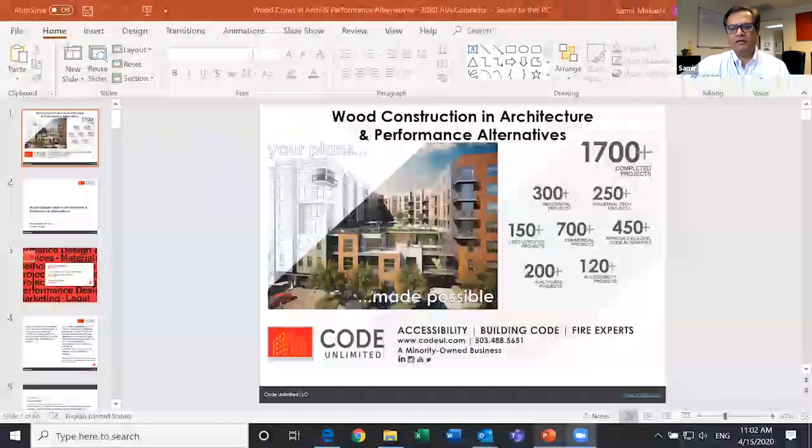Good morning, everybody, or good afternoon for you guys. I'm 1 hour behind you guys. So I'm going to share my screen, and hopefully everybody can see my screen, and we'll start from there.

This is a unique presentation that I custom designed for AIA Colorado. I've given similar talks to other jurisdictions, but this is custom fit to your needs and requirements. So we'll talk about that.

In this presentation, we're looking at wood, especially mass timber, and talk about that. Then we're going to talk about alternates to the prescriptive code requirements. We work with a lot of architects, engineers, and owners developing alternates. Sometimes the alternate is because you got in a jam by following something that the jurisdiction says does not work, or the code has changed or something like that. We develop an alternative that is equal or better.

And sometimes it's your creativity. You're developing a design and pushing the boundaries of the design that doesn't fit very well in the code framework that is designed for one size fits all.

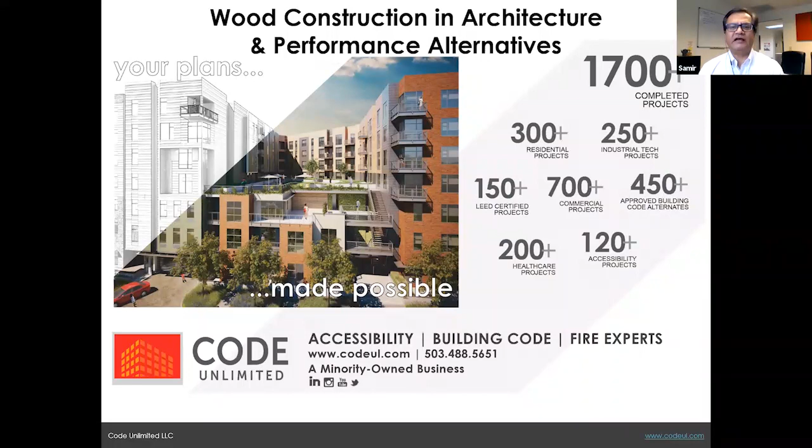So with that, we'll go through a couple of requirements for HSW credits. We're going to talk about wood construction and performance alternatives. AIA Colorado will do the continuing education credits, and it's registered for 1 hour HSW.

Tim just talked about me and what I do, so we'll skip this slide. The learning objectives: we'll give you an overview of type 3, type 4, and type 5 wood construction. Then CLT is cross-laminated timber, which is a subset of mass timber.

Type 4A, 4B, and 4C construction are the construction types that are coming. This is approved in the 2021 ICC code change, so it is not even in the 2018 code, but it's adopted upfront by many jurisdictions, including Colorado, Oregon, and Washington. Oregon has adopted it into the codes we adopted in 2019. Washington has adopted it as a separate add-on amendment to the code, and I'm not certain how Colorado is doing it. But either way, this is becoming more prevalent; more states are coming on board and doing it.

We'll understand the code intent and how to isolate code sections to develop code alternates. When you're writing a code alternate, there's a specific framework and method to it. I'll talk about it as I go and discuss the different alternates that we have done.

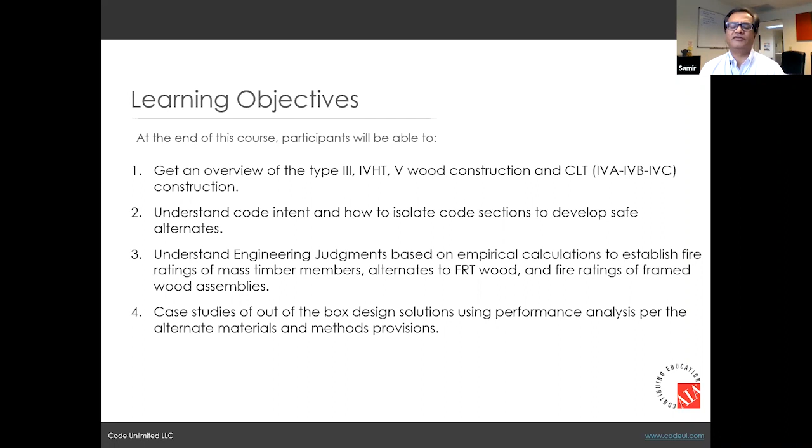So we'll start with the wood construction types and get into mass timber. Amongst the wood construction types, type 3 is the least understood construction type in working with different architects and jurisdictions. I find a lot of spec office, spec warehouse buildings that are 2-story with 60-foot yards, often listed as type 5B. We look into the details and find that they're actually type 3 construction, not type 5.

In a type 3 construction, there are a couple of critical things. One is the exterior walls are non-combustible, or fire retardant treated wood if the wall is 2 hours or less. The interior elements can be any material permitted by this code, meaning wood, steel, anything. So even though these are typically wood buildings, you're permitted to have non-combustible steel framing within it. The wood becomes the lowest common denominator.

In this example, if you look at the lower left picture, the exterior wall is a masonry wall. On the top left, it's a precast concrete tilt-up panel, and the roof framing is wood. In the middle picture, you can see there are some heavy timber members and some regular wood framing, so it's a combination of pieces. Type 3 could have multiple elements you typically consider wood, but it could also include non-combustible elements. The exterior wall has to be non-combustible or fire retardant treated.

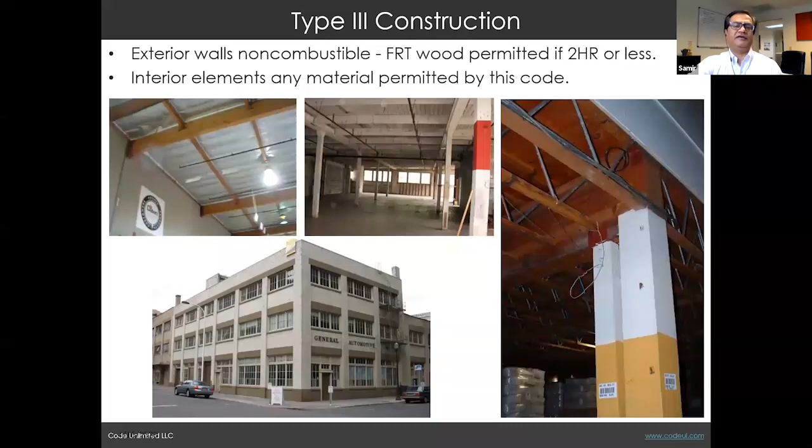Type 4 construction, on the other hand, is very similar to type 3, but it's not frequently used, because of its restriction on concealed spaces. In most facilities, if you have a drop ceiling or something like that, you would have a concealed space, and type 4 construction does not allow it. Type 4 evolved after the Chicago fire, when there were a lot of warehouses and storage places with heavy timber construction, and when the fire started, it just spread from building to building to building. So the interior is heavy timber, and the exterior, again, is non-combustible construction.

When you have heavy timber construction, heavy timber is defined by the size of the solid wood, but it also allows you to have solid wood, glue laminated wood, structural composite lumber, or cross-laminated timber as part of the type 4 construction within the 2015 and 2018 codes.

In that code, this table summarizes it. If you have solid sawn, the left two columns show the width and depth of the sizes you require, then the glue laminated dimensions are different, and structural composite is different. That's based on the performance of the different members and how they're available, either nominal or actual dimensions. The dimensions given are the actual dimensions of those wood pieces.

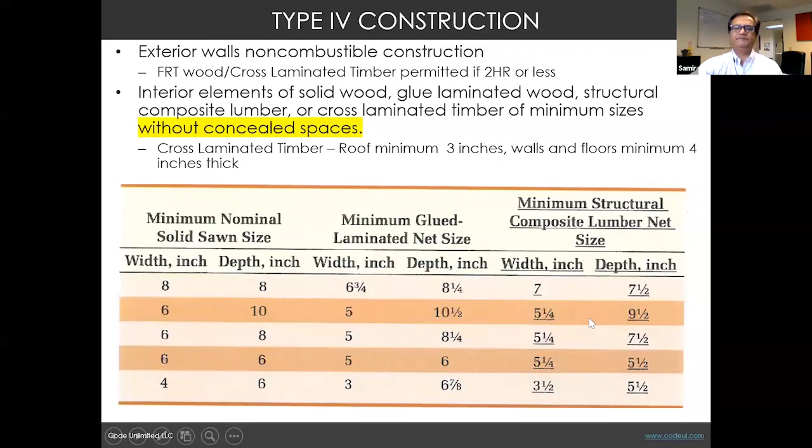Here's an example of heavy timber. You've seen the log cabin type of construction, that is heavy timber. You've also seen some CLT uses, and that can also be part of heavy timber. And then 2021 creates a separate CLT construction type, which we'll go into in detail as well.

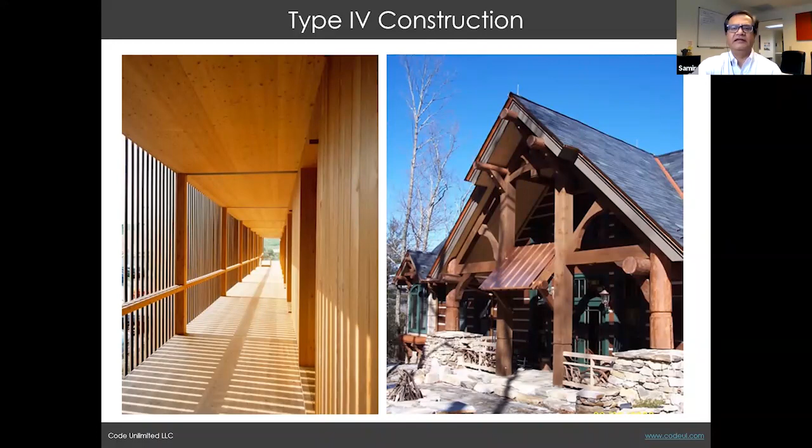Type 5 is the lowest construction type that you can build out of. Again, type 5 is typically understood to be framed wood construction, but you can have plastic as an element, and you can have steel as part of that construction type. Type 5 is typically the lowest construction type, so your typical areas and number of stories are all limited, based on the risk assessment and risk management of the code. The lumber sizes, the nominal number versus actual dimensions - some architects work a lot more in wood, others don't, so understanding what you're seeing and what your code requires is important.

So again, type 5 is anything in wood, typically wood framed, does not have a restriction on the exterior walls like type 3 and 4 have. Type 3 and 4 both require the exterior walls to be non-combustible or fire retardant treated. Type 5 allows any construction type.

In these construction types, there is type 5A and type 5B. Type 5A is typically 1 hour construction. Type 5B is non-rated construction.

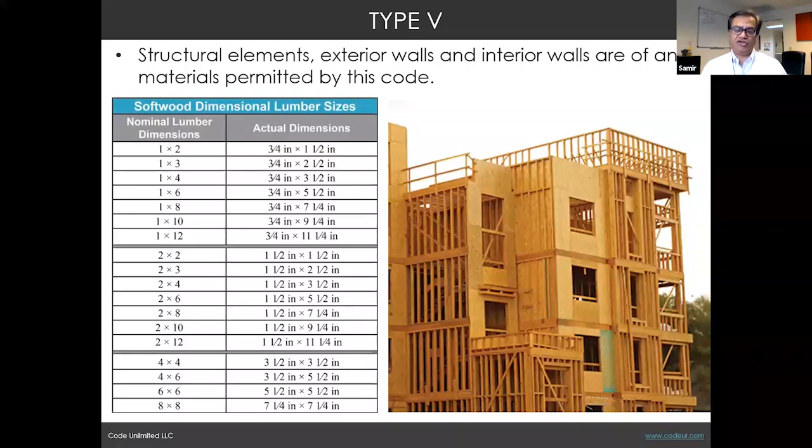Similarly, type 3A and type 3B. Type 3A is 1 hour construction, type 3B is non-rated construction. Type 4 is just type 4. Eventually, type 4 with the CLT becomes type 4 HT for heavy timber.

So let's talk a little bit about mass timber and how it's defined and how it works. Mass timber is the umbrella term, and under that you have CLT, cross-laminated timber; NLT, nail laminated timber; DLT, dowel laminated timber; glue laminated timber; and also parallel strand lumber. All of these are subsets of mass timber.

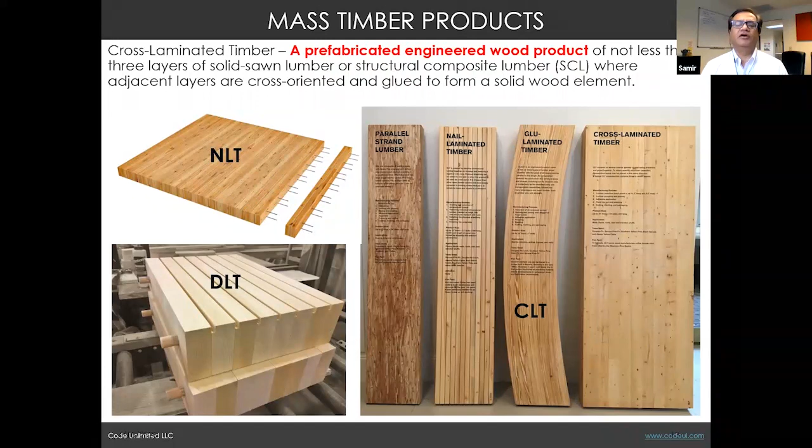Cross-laminated timber is a prefabricated engineered wood product, not less than 3 layers of solid lumber, placed in cross directions—one goes one way, the next layer goes the opposite direction, and the third goes back again. In a way, it's like a two-way slab, reinforced two-way slab, with reinforcement going both directions. That's the advantage of CLT, because the timber members go in 2 directions, it has strength in both directions.

Typically it's 3-ply, 3 layers, 3 lam or 5 lam or 7 lam. We've seen some larger ones, but 5 lam is the most common we've seen. 3 lam is typically not fire rated, 5 lam is fire rated, 7 lam is fire rated - that's typically how we find out. Panel thicknesses could be up to 15 inches; 5 lam is about 6 7/8 inches thick. The width of the panel can go from 2 foot to 12 foot, and length from 20 foot to 60 foot long.

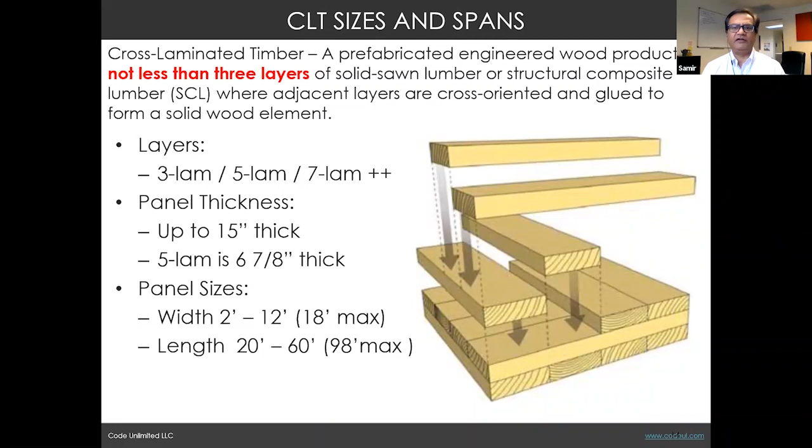These dimensions are really driven by the manufacturer's equipment and how large an equipment they have, what type of capacity they have, and that actually helps define the element of this.

So understanding mass timber and how it works - one of the common things that comes up with everybody is that wood is combustible. So if you're building a cross-laminated timber building, you're essentially creating a pile of wood that can be ignited by a matchstick, and it will all go up in flames. Let's get a little bit into the details of the material qualities and properties and how they're different.

Most commonly, fire marshals and others we talk to come back and say steel is the best element because it's non-combustible, it will not burn, and wood is the worst element because it will burn right away. Well, it's not that simple - there's a little nuanced understanding to it.

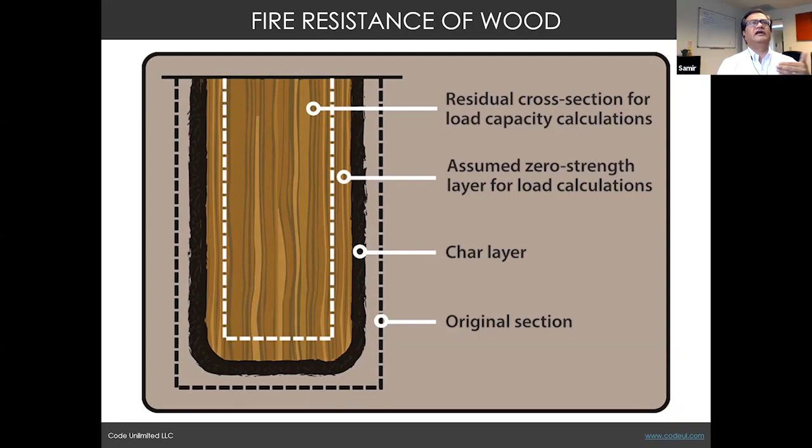One, steel, even though non-combustible, is typically not where the fire starts. The fire starts with the contents of the building, not necessarily at the structural component. Two, the failure of the material is also significant, because what we see as fire is flames, ignition, but really in terms of thermodynamics, fire is just elevated temperature.

Flame is one expression of the fire temperature, elevated temperature is the other, with a much more significant impact on structural elements. Steel, when exposed to temperatures over 1300 degrees Fahrenheit, fails - it becomes so malleable it cannot hold its weight and it falls. Typically we protect steel by sprayed fireproofing or an envelope around it, which provides insulation to prevent the temperature from outside that envelope from reaching the steel inside, so the surface temperature doesn't go over its failure temperature. This is how fireproofing works in steel.

Wood, or CLT, works very similarly. In this diagram, the white dashed line is the size of the wood member needed for the structural stability of the building. The black dashed line is the size of the member used to design the building. So the space between the white dashed line and the black dashed line is the insulating element.

So the fire attacks the outside and burns through, and until it burns through the white line, the temperature inside is not reaching the fire temperature.

Another thing significant in wood is that wood failure occurs by mass loss. Wood can handle a lot of temperature - the wood member can go up to 2000 degrees and not fail. It fails when you burn through. So a steel member can get exposed to elevated temperature and fail right there at that temperature, but for wood to fail, it has to burn through. As the wood burns through, the charring that takes place actually protects a barrier for the fire to progress, because the char acts as insulating material, and char also displaces oxygen, so it starves the fire.

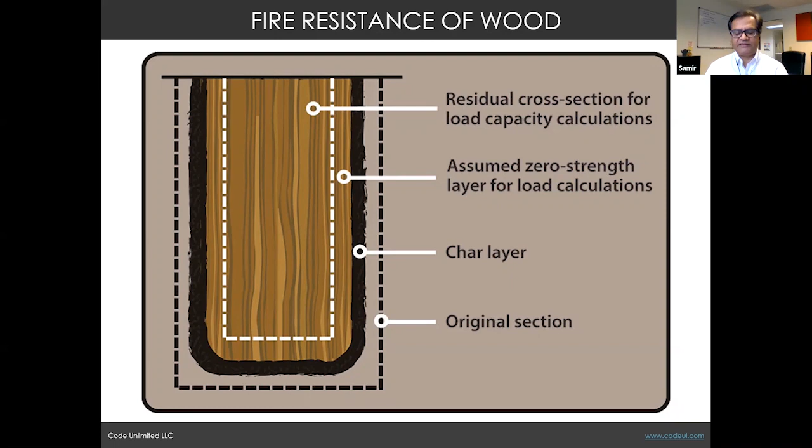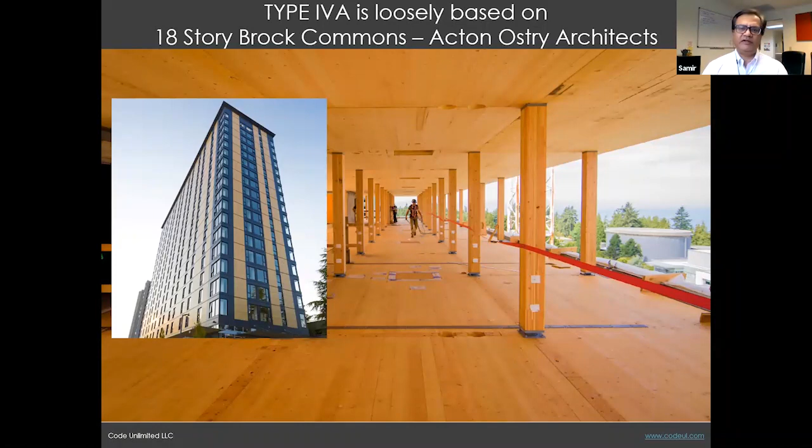So in the CLT there is type 4A, type 4B, and type 4C, the three different construction types. They're being introduced in the new code, and some jurisdictions have adopted them early. Type 4A is loosely based on the 18-story Brock Commons, done by Acton Ostry Architects in Vancouver, BC. The code team looked at existing buildings that had used mass timber and followed up on the research based on mass timber, but this is where it comes from.

The 18-story number comes from that building example. Type 4B is loosely based on a 12-story framework building designed here in Lever Architecture. It was not fully finished because the funding went away, but the building was designed and got all its approval through the local jurisdiction. That is a 12-story office building. If you look back at the code, you'll notice this 12-story office building is also comparable to type 1B construction and what is permitted under that.

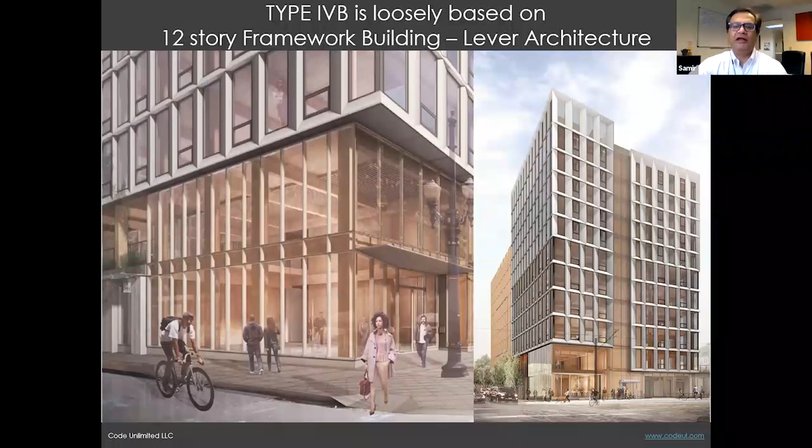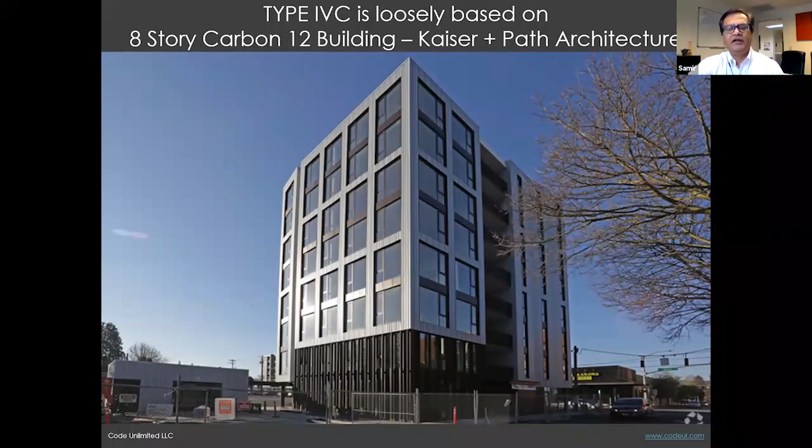Then the 8-story Carbon12 building is the one that was used to develop the type 4C construction. This was in Portland by Kaiser and Path Architecture, and that is the basis for it. So if you look at the type 4A, B, and C construction types, this is kind of the cheat sheet of what you need to know if you're starting into it. There's a little bit more to it, but here's what you start out with.

So in type 4C and type 4B, in both instances, the primary structure is 2-hour rated and exterior bearing walls are 2-hour rated. In type 4A, the primary structure and exterior bearing walls are 3-hour rated.

One of the things is that in all three construction types, the exterior wall face has to have a gypsum board on it. Then for the interior wood, there's a variation on whether it's permitted to be exposed. In type 4C, the interior wood framing, exterior walls, floors, everything can be exposed, and that is permitted. In type 4A, nothing is exposed, everything is covered up.

Type 4B is the in-between, neither A nor C, and is the most problematic area we're finding right now. One of the things happening is most architects want to design to type 4B, but they don't want the restrictions on the exposed wood. We'll talk a bit more about some of the designs we're working on where this condition exactly happens.

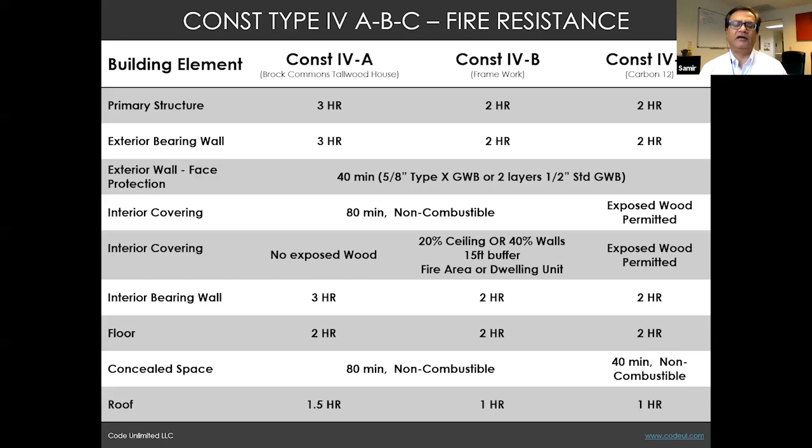In type 4B, you're allowed 20% of ceiling or 40% of wall exposed relative to the floor area. So if the floor area is 100 square feet, you can only have 20 square feet of ceiling exposed. If the floor area is 100 square feet, you can only have 40 square feet of exterior wall exposed. So that is the condition.

Now if you look at the allowable area and heights, you'll see the difference between type 4 and type 3, and between type 4A and B. There's a screen here blocking my path, I'll take that and put it on the side. So in type 3B, the building height is 75 feet. Type 4 heavy timber, or type 3A under the current codes, is allowed 85 feet.

So type 4C starts with 85 feet, type 4B goes to 180 feet, and type 4A goes to 270 feet. So it's pretty tall structures that are permitted under wood.

The advantage of CLT is it's lightweight. Typically steel and concrete structures get very heavy because your floor is always a composite deck, which carries a lot of weight as the stories go up, and wood is much lighter than that, so there's savings there. Also, the wood comes pre-prepped, so you don't assemble or frame on site. You get a manufactured piece, and the installation goes much faster than traditional building construction.

A couple of things to watch out for: in different occupancies like an I2 or an I3, there are different permissible heights and stories than what is permitted in other cases.

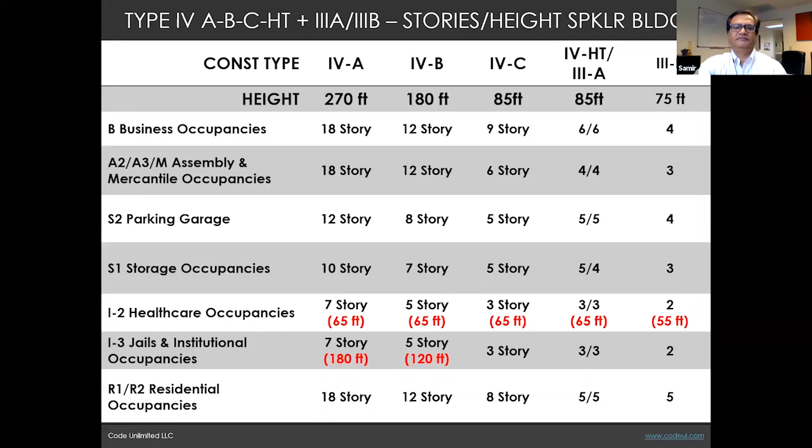One of the things that comes up is wood joinery in CLT. Because wood CLT is fire rated, the joinery is very important. In some of the early CLT manufacturing, the joinery was exposed, and we had to design fire ratings or fire rated protection for those joints.

Now, a lot of the material is doing concealed fasteners, like you see on the right, and the beam just slides right into it, and the fit is really, really tight. You don't get that kind of construction finish and accuracy, even in steel structures. So the finished product of CLT is very accurate, much more so than steel framing that we are used to.

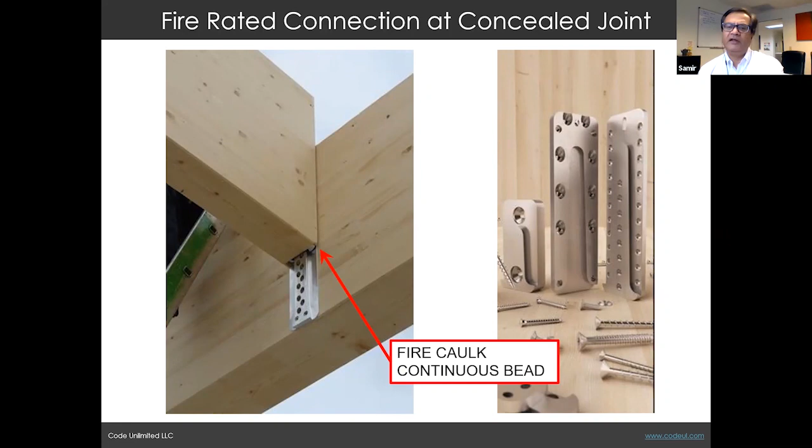And what you do is typically have a fine fire caulk continuous bead applied around the joint, and that gives you the fire rating because the steel is not exposed, and the fire caulking protects the joint from fire. Many of the assemblies are now tested for fire, so you have a listed assembly, but if not, we can create engineering judgments for those.

This is a condition where there's a wood column supported on steel plates, and then the concrete fills up and covers the steel plate, and that's how fire rating is achieved at the floor level when you have connections at the wood.

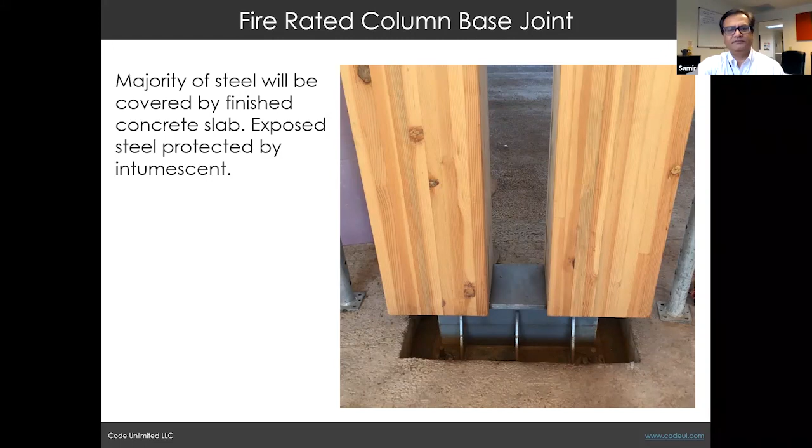There's also a lot of through penetration joint protection now available, with some tested assemblies. Some things to think about: when the joint, typically in a steel or concrete assembly, has a penetrating element exposed to fire, what happens is the penetrating element is the only thing affected by fire, and the rest of the structure is not.

But in wood, the fire also affects the wood, and as the wood gets burnt along the penetrating item, that condition is different than a typical concrete deck or steel deck. So the penetration assemblies are different for CLT than they are for steel or concrete members.

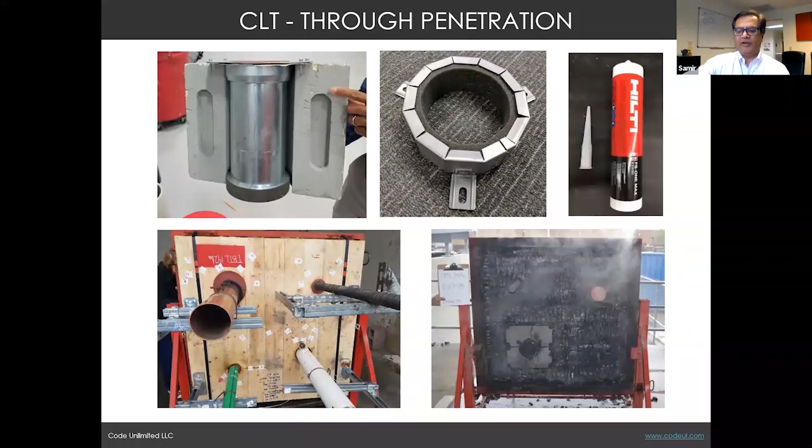So now we'll go into alternate materials and methods.

So there's two things in the code. One is called a code modification, and the second is called alternate materials and methods of construction and equipment. The code modification is really a waiver. If you cannot meet the code, you write a code modification to the jurisdiction and ask for a waiver because you cannot do it.

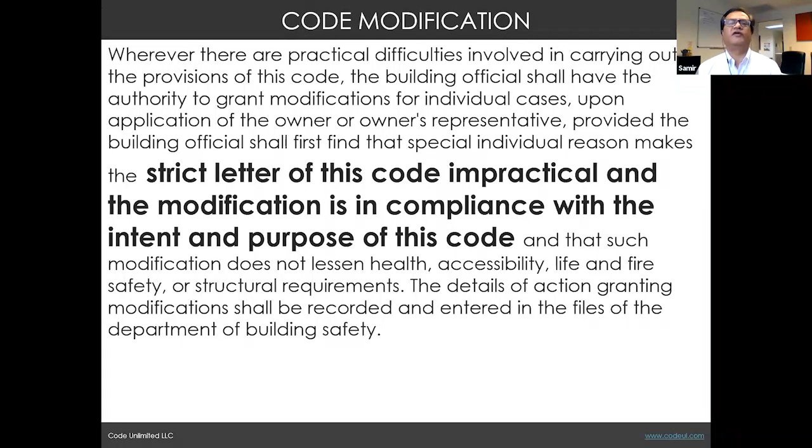Typically this happens when you have an existing condition that you cannot rectify - that's where you'll go for a code modification. The code alternate, on the other hand, is saying I don't want to meet the prescriptive criteria the code says, but I will provide equal or better protection with a different assembly or method of construction. Both are permitted by the code.

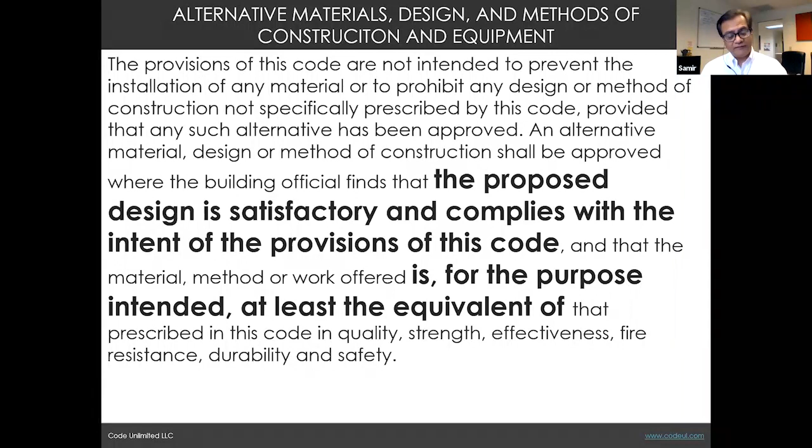The alternate materials approach is more common because the jurisdiction is not waiving the requirements but requiring you to meet them differently. When this condition happens, typically the key issue is that the onus is on the designer and the code consultants, often working with you to develop the alternative. So one of the things is also establishing what the code intent was behind it and then meeting that requirement.

So in CLT or heavy timber, there are standards established that allow you to calculate the fire resistance of the building element. Based on the thickness of the wood, we work with the structural engineer to understand how much of the wood is a structural component and how much beyond that is for fire rating. We can develop alternatives based on that.

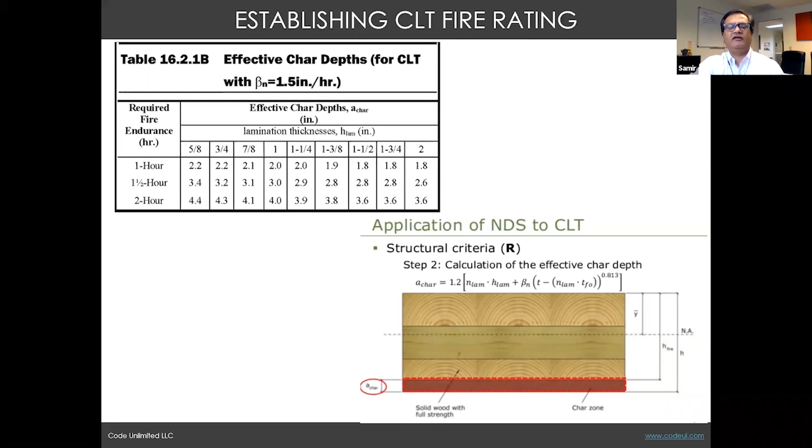We typically have an engineering judgment stamped by a fire protection engineer as the deliverable and final result that goes to you and to the jurisdiction.

I talked to you about the CLT systems prefer concealed fasteners - even today some architects like to see exposed fasteners and things like that, especially if it's a fire rated component that needs to be protected. So we had two options. In option left, we used intumescent.

So we look at the steel plating, compare that to established testing on similar or comparable materials, and then extrapolate from that what would be needed for the steel material to be protected by intumescent material. So intumescent would get applied on that.

On the right-hand side, we actually used wood, sacrificial wood. So wood is applied on top of the joint. That wood is not part of the structural element. It's applied like a sprayed fireproofing on top of the joint to protect the fire from eating through and attacking the steel connecting members.

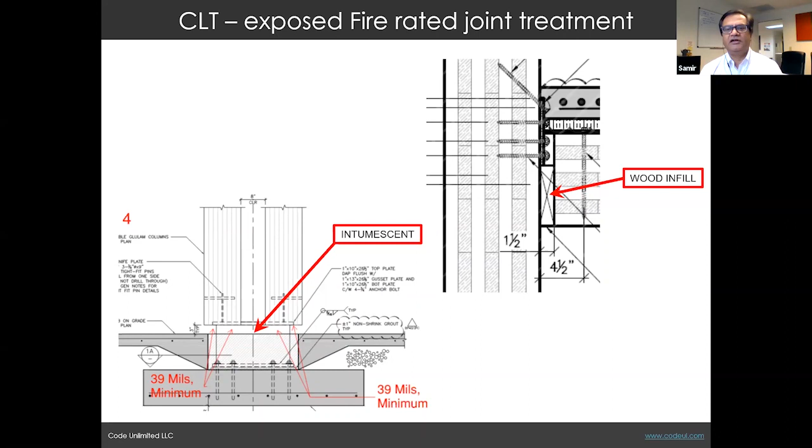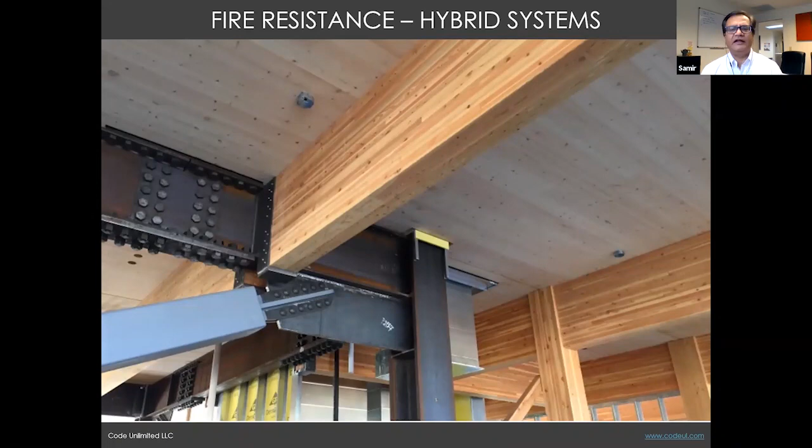The gypsum board was covering it all. We did it with sprayed fireproofing and made sure the fireproofing could adhere to it properly. We can do it with intumescent, we can do it with gypsum. There are different ways to provide that rating, which just gets a custom design at this level.

Now we'll talk about some wood, concrete, and steel framing and how you do fireproofing for that. Here was a condition where there was a corridor ceiling, floor ceiling assembly that was done by just 2x6 on an edge assembled, and in between the engineer added an HSS tube framing member, and that was the one thing that was throwing everybody off and causing consternation for the designer and for the jurisdiction. They came to us asking for relief, asking can you look at this and tell us if it is meeting the requirement. This was a 60-minute assembly required.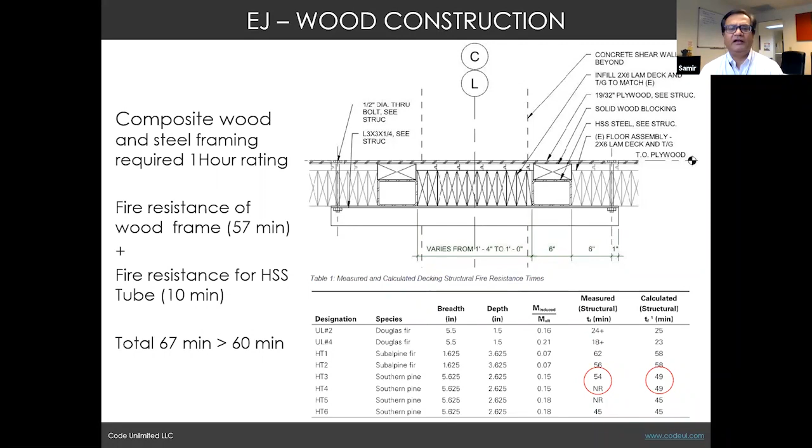So we looked at the wood framing and were able to determine that most of the wood framing was providing a 57-minute rating. We had tables that we were able to look at for the wood framing based on the type of the wood, and we were also able to look at the HSS steel member and give it a rating of 10 minutes based on its dimension. We were able to demonstrate that this assembly would withstand 67 minutes total. Together, the steel and wood were working in combination, and therefore we were able to establish that this was going to be at least a 60-minute rating.

Another example was an existing building at the University of Oregon campus. It was a building where a portion was above ground, a portion was underground, and there were multiple buildings forming a courtyard. Under the courtyard was a building, and people walked over it. It was a complicated area, done in a period when jurisdiction review was lax, and where one building started and one stopped was not very well established. We got into a lot of that and cleaned it up by treating it as a podium style building.

Now we required the basement underneath the courtyard to be separated by 3 hours. It had a concrete waffle slab that was existing, and on top of that the architect came in, put in rigid insulation, and poured a topping slab on top of it. The original design did not have the topping slab, and it was only a 3-inch waffle deck at the top, which wasn't getting the 3 hours we needed. But with the topping slab, we were able to get that.

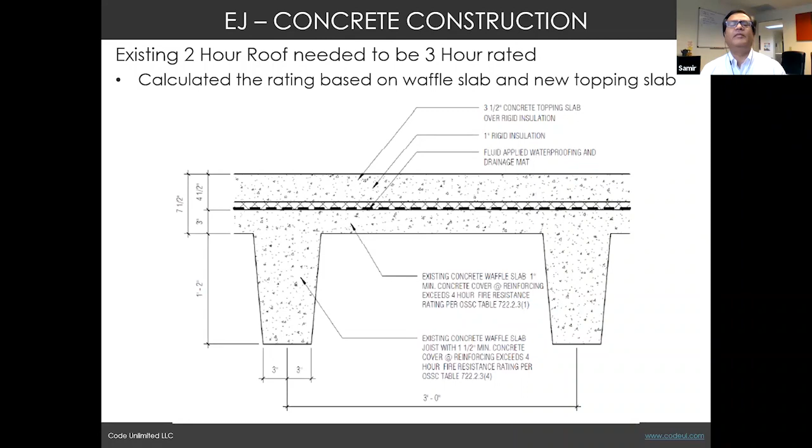We were also able to demonstrate that the rigid insulation, which was within the concrete, would stay stable at the elevated temperatures and would not be impacted and would not compromise the rating. So we looked at all of this and came back and established a 3-hour rating for that assembly.

Here's another example that we're working on. This was a tube steel again, which was in an exterior wall assembly. The wall was framed, and then the tube steel was inserted to support it. Then the question was, how do you support it? If you look at the details, the tube steel, the weight, the size, and the framing of it, the tube steel only had a single layer of gypsum, while the wall had 2 layers of gypsum. So the wall itself was 2-hour rated, and how do you handle it?

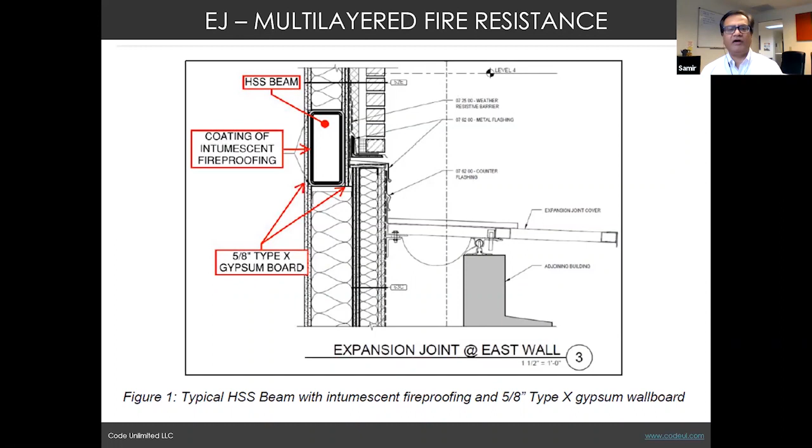The beam was the issue. So we looked at the beam, looked at the wall, looked at the assembly, and provided an engineering judgment that gave an intumescent coating thickness that can be applied on top of the tube steel. The single layer of gypsum in combination with the intumescent fireproofing gave it the rating required for the wall. We were able to do an engineering judgment again on that one.

For that one, we actually not only had to develop the tube steel, but we didn't find a beam assembly for it. So we looked at the column assembly and the intumescent for that, and then took that element and adjusted it for the beam performance. The column and beam are under different loading conditions, so the requirements are different, the exposure is different. We were able to translate that column information and apply it to a beam condition and provide an engineering judgment.

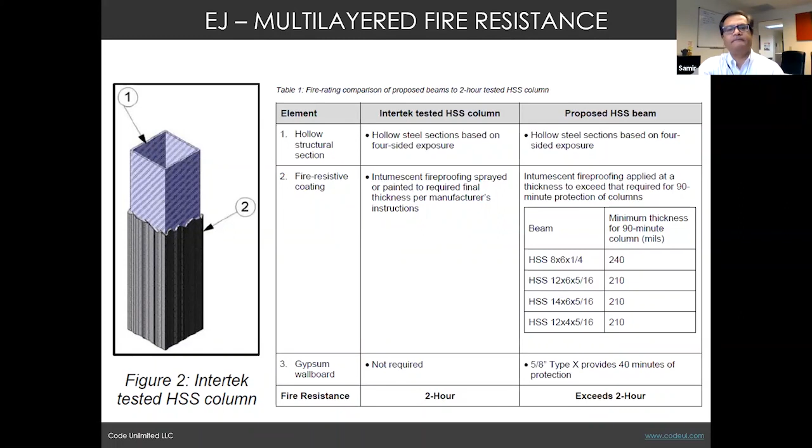So here's a couple of designs that I'm going to go into now. This is where we are using performance analysis rather than empirical analysis, and providing code alternative designs for that.

So this is an interesting one. This is for a Multnomah County courthouse. The building is under construction and is now almost finished. It will finish late this year or early next year, I forget. This was interesting: the architect came to us early, and as part of the design concept, if you look

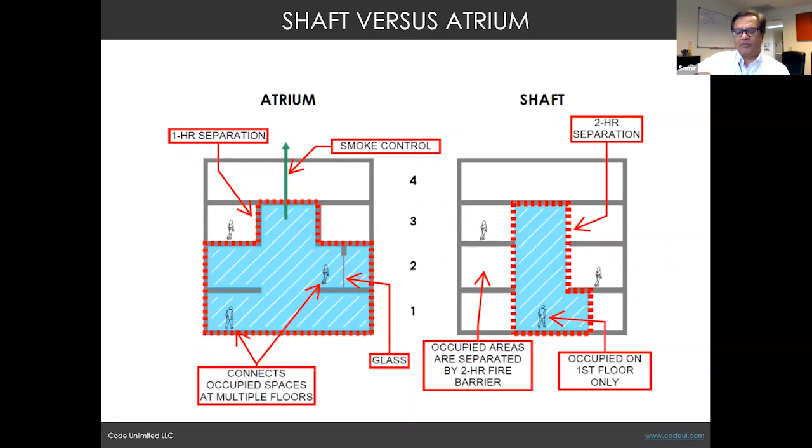The city accepted this in principle but had some concerns. One concern was about the inmates here and the police officers here, which would be separate. The building exits for these groups go directly into the stair at the top, so they didn't have to go through here. But under an emergency, they said if a fire started and people started going here, then what happens?

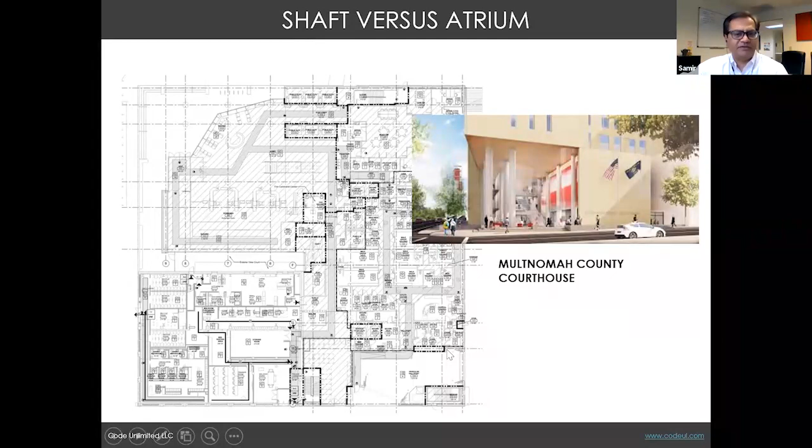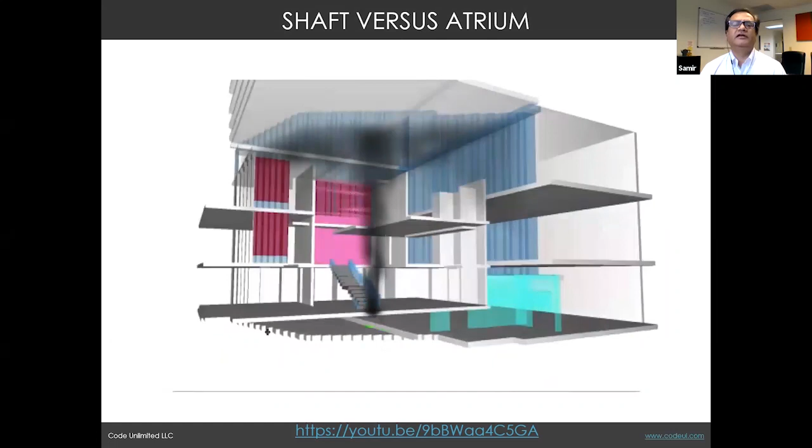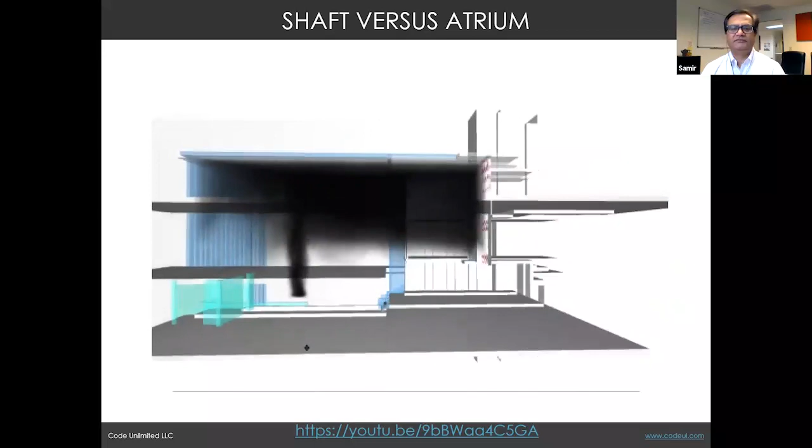So we actually modeled this and showed it to the jurisdiction. We started a fire in that 3-story space, smoke detectors activate, doors shut down the 3-story space. The stair is not a means of egress, so it doesn't need to be part of the egress. Because of the large volume of the space, there is a smoke reservoir that allowed the smoke to collect up at the upper 2 levels, while the first floor was free for egress.

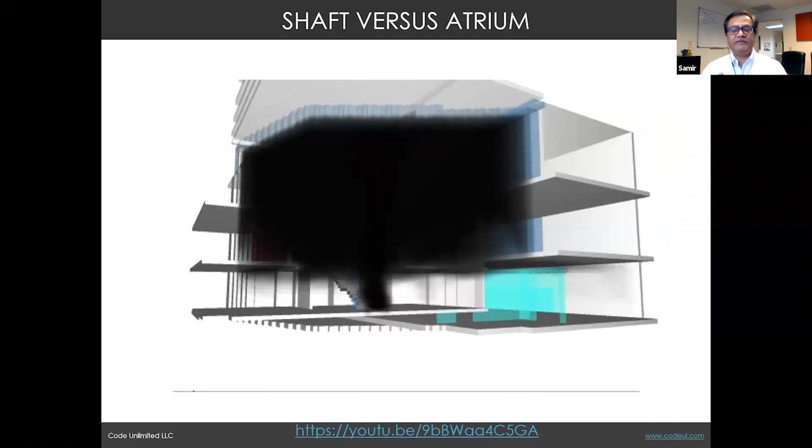We demonstrated that, and there are a couple of things important here. In this lobby, which was a public lobby but not a lobby where people are sitting, there wasn't a large amount of seating, sofas, wood framing, or wood furniture. So the combustible material content was limited and the volume was large — that was the argument we presented.

We also did an egress model. If you look at this, the blue square is where you're going to see it. The people in the main hall, the triangular space top left, are going to see a fire start and respond to it. But the people in the rest of the building are not going to see the fire, and will only respond after the smoke alarm detects it and notifies them. So you can see the people on the left taking off — that little green dot where the circular template is, that's the source of the fire.

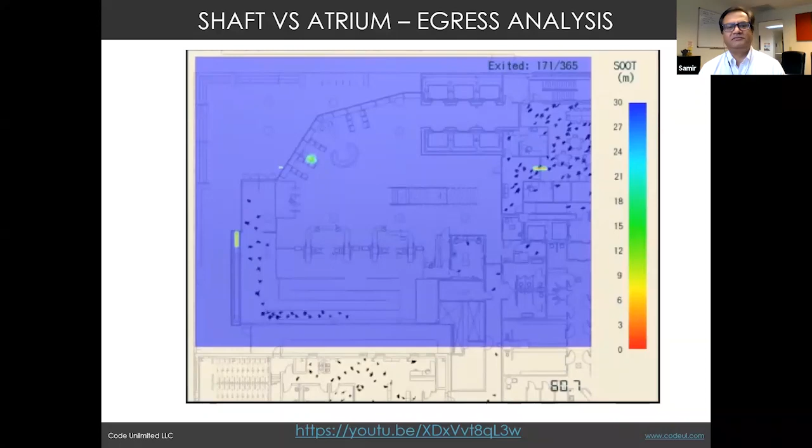So the people in that area have left. Security guards are making sure that the door remains locked and nobody's coming back in.

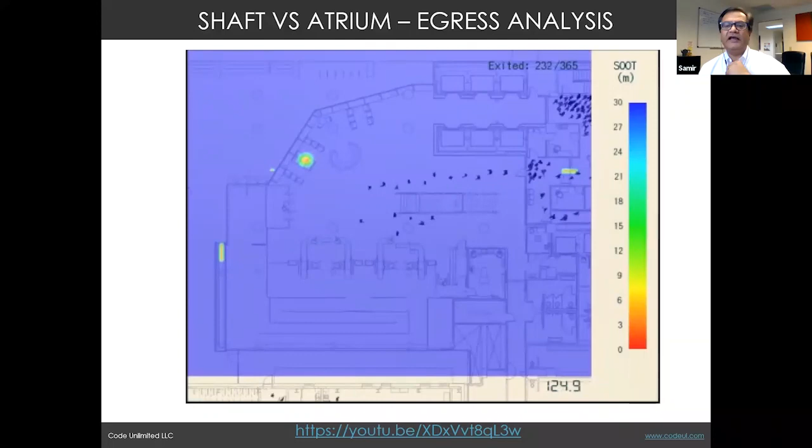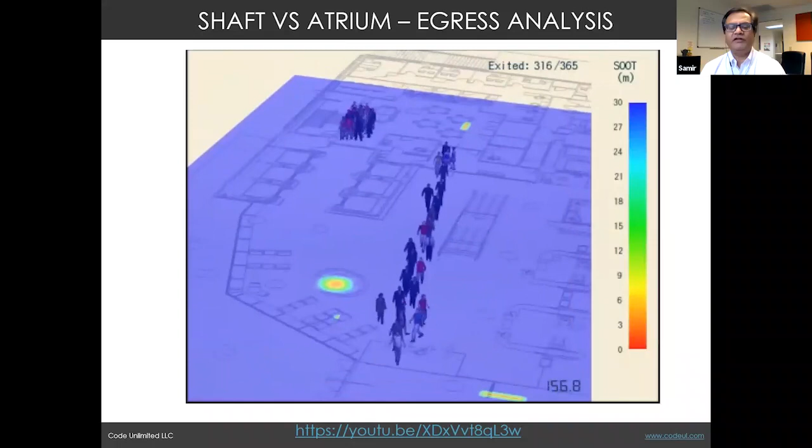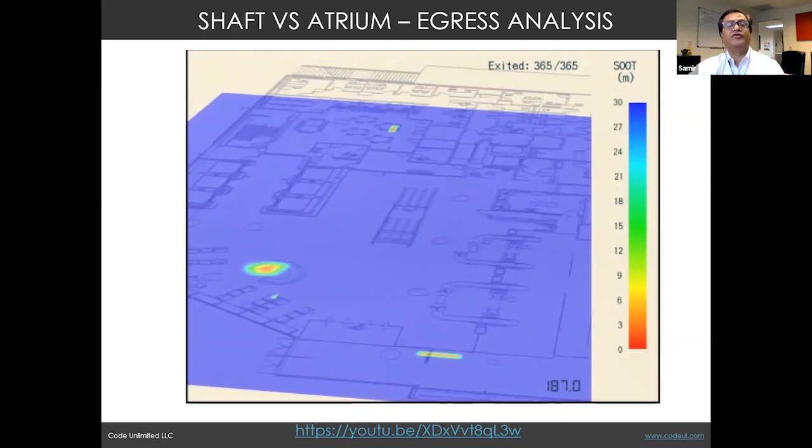Now the rest of the building recognizes this, and even though the exit stair is the exit, they don't need to go through. We also assumed that people would go through the other door in an emergency, not following the requirements, and therefore they're going through. We considered that additional time for those people to exit the building in the 3-dimensional model I showed you earlier. So we were able to demonstrate that we don't need smoke control because the size of the atrium maintains the smoke reservoir, and people can safely egress.

Here's another example of using performance analysis. This is in Seattle, Washington. This was a high-rise building, and the occupant load on that floor went over 500 occupants, requiring a third exit. Most commonly in these conditions we recommend a horizontal exit, but Seattle does not like horizontal exits.

So in this instance we were fortunate. The stair on the left is stair 2, the stair on the right is stair 1. Stair 1 was a larger width stair, so the egress capacity was large. As we looked at it closer, typically what we find is even in wide stairs, the doors are narrow, and the doors actually become the bottleneck in our analysis.

So we proposed making that door wider to the stair, and we looked at the scenario of 3 stairs versus 2 stairs, then did a performance analysis and went back to the jurisdiction. Actually more people get down faster in a 2-stair configuration versus a 3-stair configuration. In the 2-stair configuration, exit time is 524 seconds. In the 3-stair configuration, it became 562 seconds.

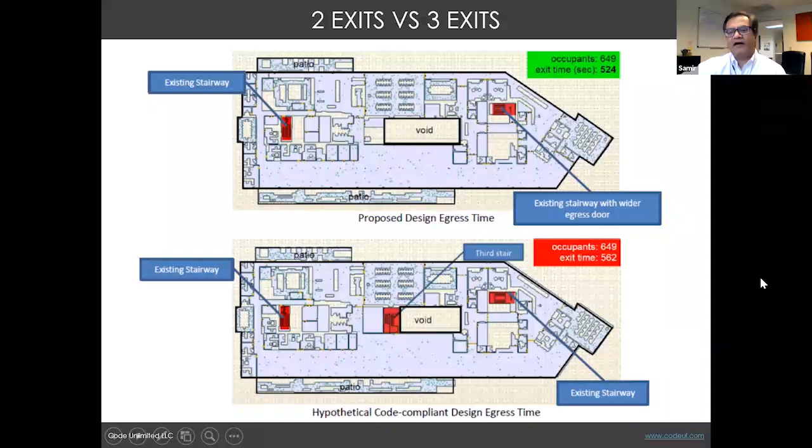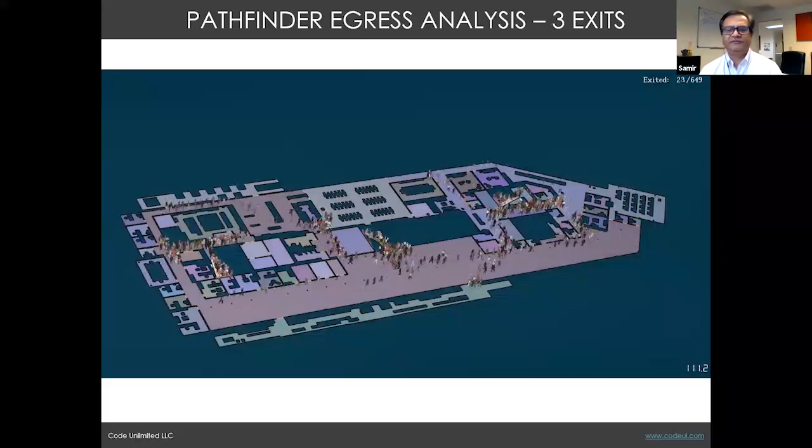So total time was 649 people exited and 524 seconds total for everything to go down. Here's the 3-exit criteria, with the same number of people going through 3 stairs. In this scenario, because of the stair, you'll find that people actually go back and forth when queuing happens.

Some people go back and forth, and the analytical CFD model, the egress model that we use, is a very powerful modeling tool that allows us to assume those requirements. Here we find 562 seconds when everybody's left. So just adding a third stair does not make the egress faster - there is a different performance analysis that goes through.

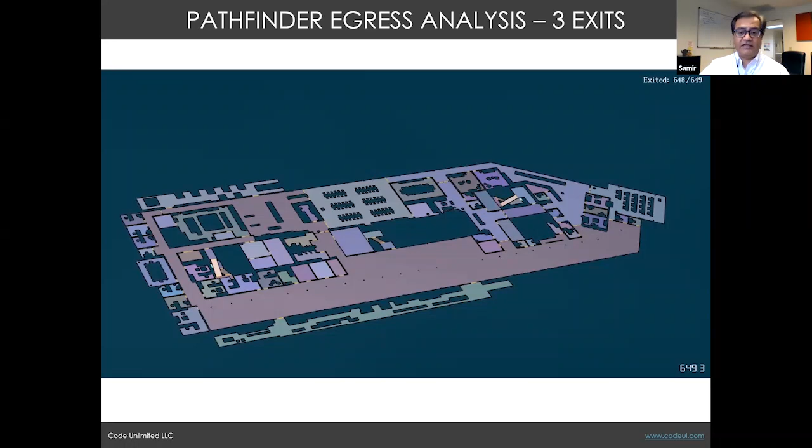In this one, we had assumed everything was a 3-foot wide door. In the other one, we made one of the doors, I believe, a 4-foot door, and that helped move people much faster. So these are the kinds of things we do as the designer is developing something - we work with the designer and the project goals to develop performance analysis that'll work well with it.

Here's a condition we had designed as a 3-story open stair. This was when the first 2012 code edition came in, and the code permitted 3-story open stairs, written so you could use it as a means of exit access stair. We submitted this for an appeal in the City of Portland and got it approved, but then somebody went to a code seminar and found an obscure requirement in 2012 that said you can only go down 1 floor, not all the way down. So what was approved came back, and we were stuck because the design was quite a ways through.

Fortunately, this stair was a 6-foot wide stair - much wider because it was a central, grand stair, so it wasn't limited by size. The code restriction on not allowing people to go down more than 1 floor is based on travel speeds: people travel faster on horizontal surfaces and slower on stairs going down. So the code allows you to use exit access travel distance as if it's a horizontal surface, without accounting for the slower speed.

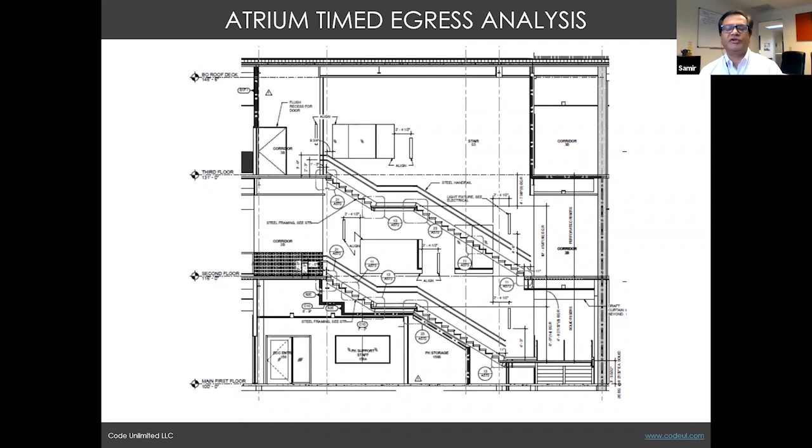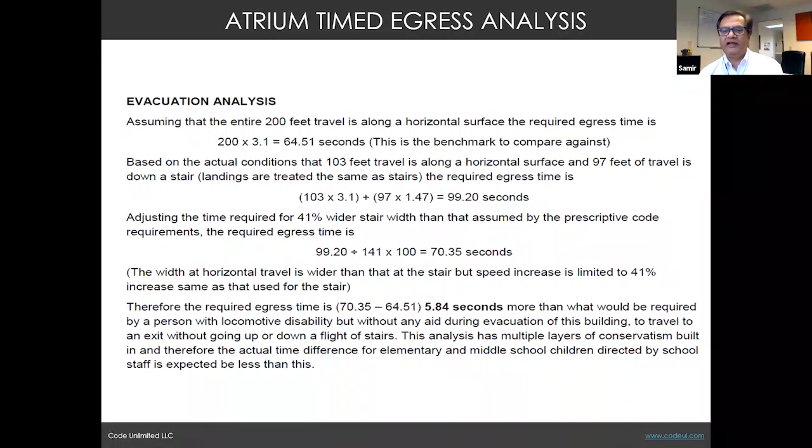We did calculations based on that and came back to the city and demonstrated that in this building, by using this 6-foot stair versus a standard 3-foot stair, people going down would actually be delayed only by 5.84 seconds compared to going down a standard stair. The city looked at it and reapproved that approach, which they had approved previously, then denied, and then got reapproved. So here's the challenges that happen.

Here's the condition. This was an existing student union building at University of Oregon that was built as a Type 1B building. Then the architect came in and wanted to redesign an addition to the building. And because it is Oregon and wood is such a common element, and University of Oregon is heavily involved in CLT development as well, they wanted to build out of heavy timber components.

We told the architect that would be very problematic, don't do that. Of course, they didn't listen to us. So we had to come back and develop an alternative. What we did is we developed a firewall between the Type 1B and Type 4 construction, except part of it was existing. We didn't have a full firewall, prescriptive firewall built. Parts of it had very large openings in it. So we had to develop a strategy that covered up, addressed all of them.

So here's the firewall that is there right now. Right there behind the 3 girls walking is the firewall that we have designed. As you can see, you don't notice the firewall at all. But what is all built up is there's a shutter that closes off here, and there's different sprinkler designs there and here, and there's rated walls in between as you go further back.

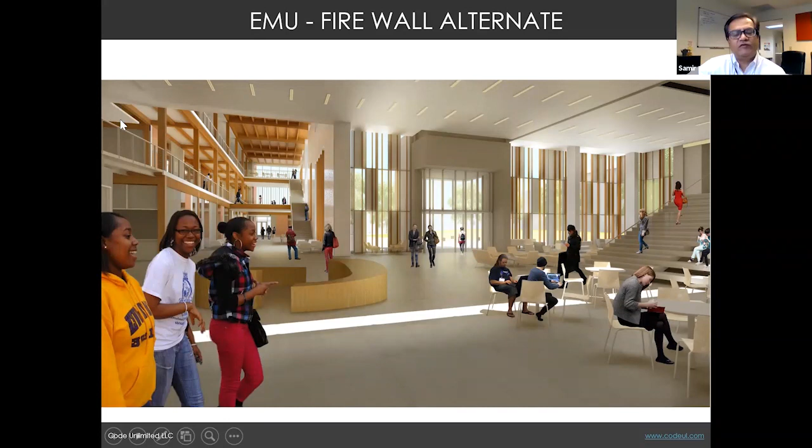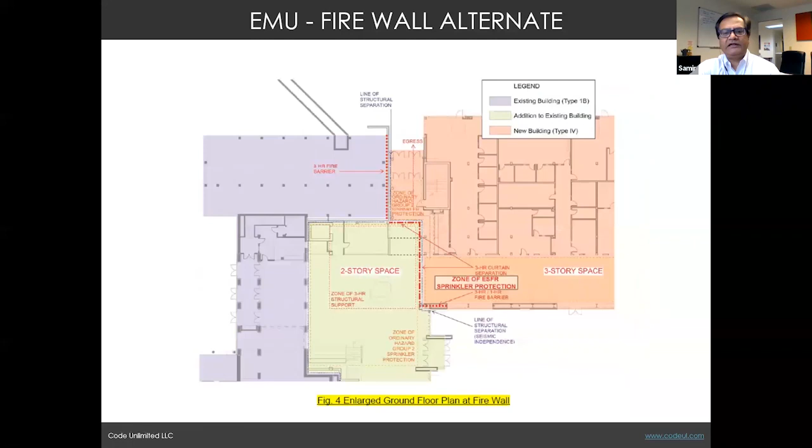So we did a combination of a 3-hour firewall where it was existing, a 3-hour fire barrier wall where we couldn't make it exactly, and then we added extra sprinklers on either side of it. And especially on this side of the 3-story open space, we had large drop sprinklers figured out. So our fire protection engineers, our building construction experts, in all of it, we worked together with the architects to develop a scenario that will work with the design and meet the code requirement.

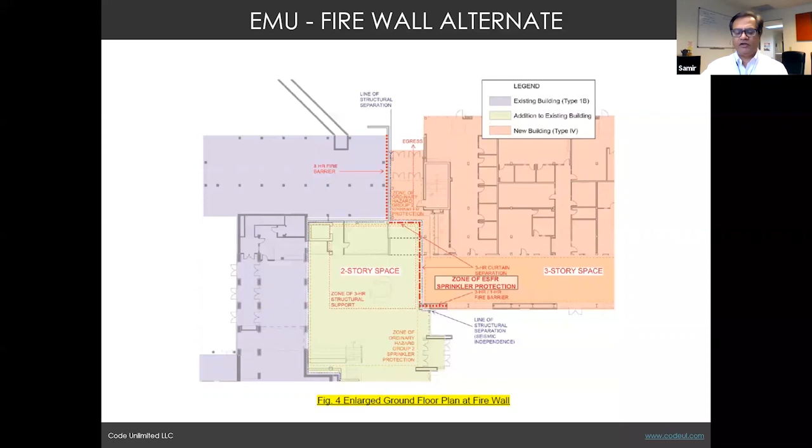And the city of Eugene was great to work with, but they were not cutting us any slack because for the firewall, they wanted to make sure that everything would work very well. So we worked very diligently. This was reviewed with the fire marshal, with the building official, and then got approved.

Here's another requirement. This was a unique one. The building was a standard residential building. At the lobby, there was an art piece. This art piece was thick ropes hanging from the ceiling in a wavy structure. It looked beautiful. The fire marshal walked in and said, my sprinklers are obstructed. I'm not going to permit this. Take down the ropes. My sprinklers need to be able to work as designed.

We got a late call in the evening. Our fire protection engineers looked at it and said, yep, you have a problem. What we did, we actually developed a solution: a combination of ceiling pendants and upright sprinklers at a lower level. We did 2 levels of sprinklers.

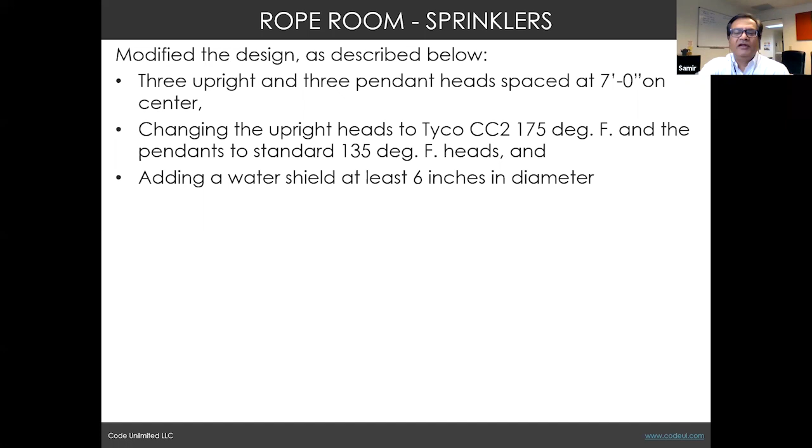The lower sprinkler could actually activate earlier—if the fire starts and the heat is accumulating, there was a heat collector, so the lower sprinkler will activate quicker. And then as the fire progressed, the higher upper sprinkler would activate as well. The fire marshal accepted this answer, and we were able to get the project back on track and open on time.

So we went in and made the argument that the exit stairs—exit is not required to go through the stairs, it is like an open exit access stair. And we put sprinklers and draft curtains along this way, so there will be protection from here. We also added a kind of smoke fan at the 3rd floor level. This is a 4-story building, but there was a rated separation at the 3rd floor. There was a fan added at the top that would exhaust excess smoke as well. So we thought we had a pretty solid case for this being done.

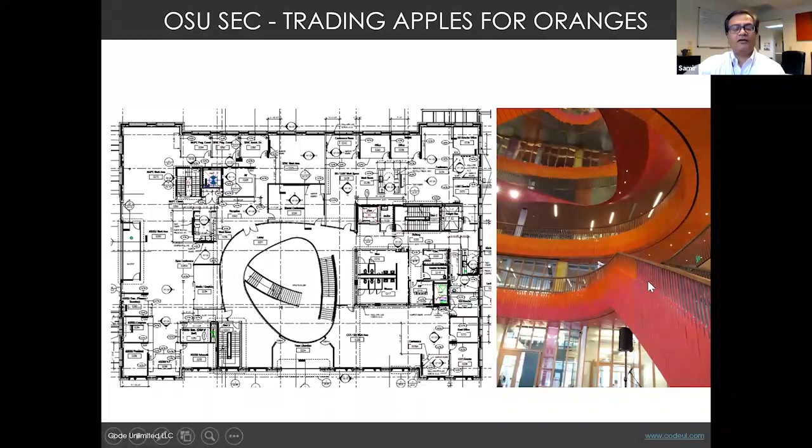Then the jurisdiction changed personnel, and the plan reviewer who had approved this left and a new plan reviewer came in. Unfortunately for us, that plan reviewer did not agree with the previous one and reopened the case. So we were able to show him that we have this protection and everything, and we are using this provision, and we don't want to do it as an atrium provision.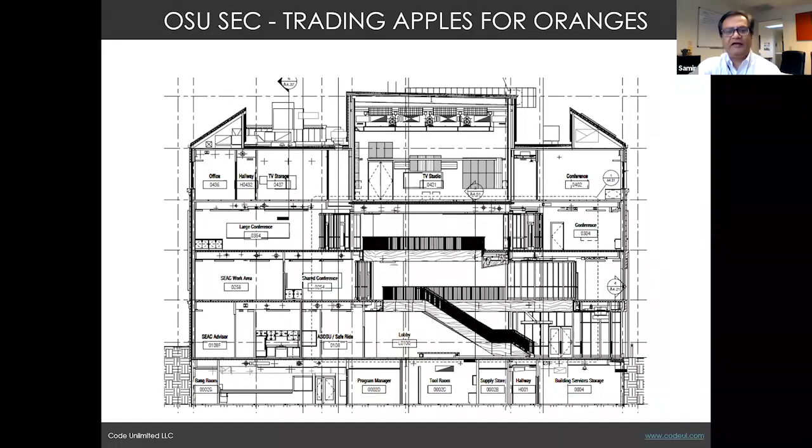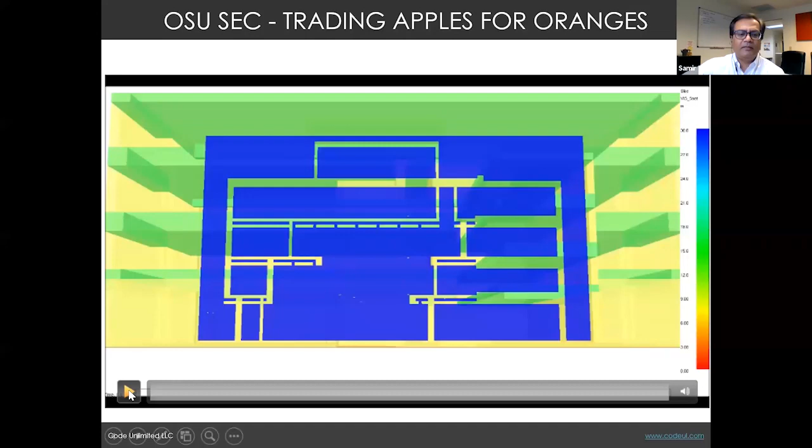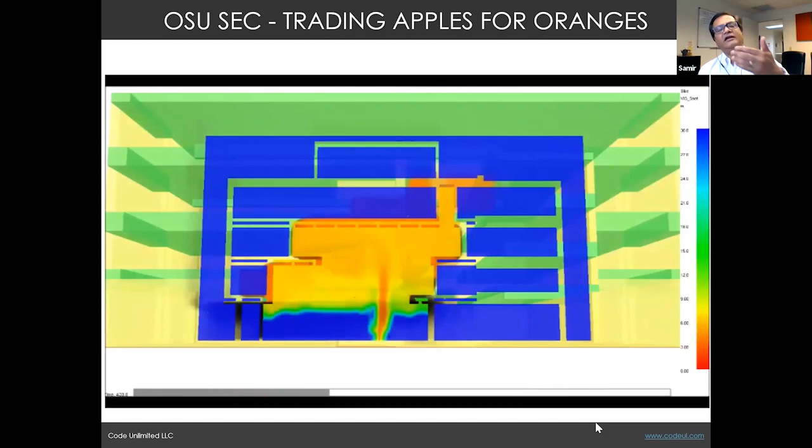This is how it looks completed. It's a beautiful space, and we actually did a simple analysis of this. It's not quite an atrium, but we demonstrated that if a fire starts, the smoke will be collected in the space, and the smoke fan will take out some of it as well. It was not designed to a full atrium standard, but we were able to get this approved through the jurisdiction again.

Here's another interesting one. This is type 3A. We talked about the exterior wall requirements to be non-combustible, fire retardant treated. The problem with fire retardant treated wood is that it has chemicals inside that reduce the structural capacity of the wood, and it becomes very difficult to work with and expensive. So we actually have a white paper that we submitted.

Instead of fiberglass with wood, we use a mineral wool combination with normal pieces, and we have an engineered system that allows you to use standard wood framing in type 3B exterior walls with the mineral wool combination without using fire retardant treated wood. In a fire scenario, the individual 2x4 or 2x6 framing in the wall gets exposed from all three sides once the gypsum is compromised, because fiberglass does not provide any resistance to heat at that temperature. But mineral wool stays in place, and the stud is exposed only at the edge.

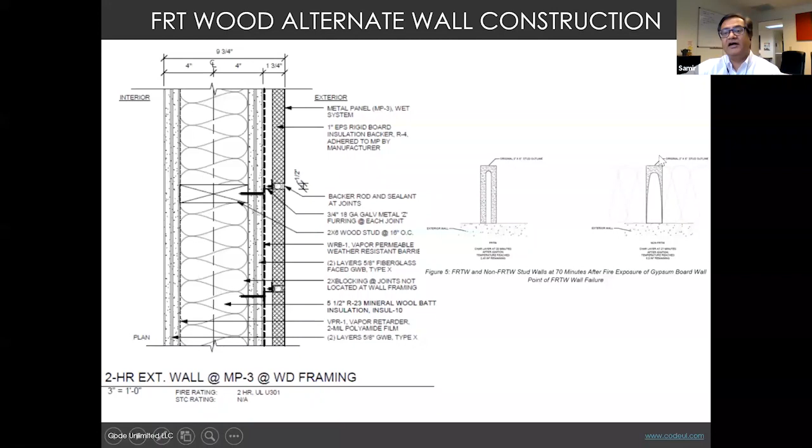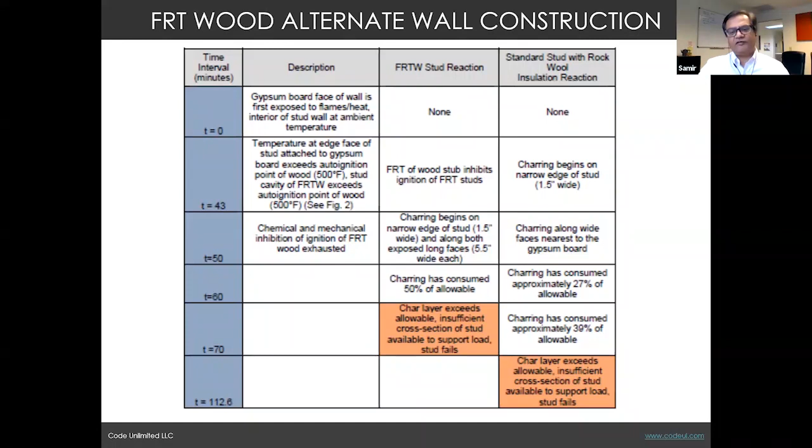The result is that the standard stud with rock wool insulation outperforms the fire retardant treated wood, meeting within the prescriptive. So in this one, we actually got far superior performance - T plus 70. The fire retardant treated wood worked for 70 minutes, while the standard wood worked for 112 minutes. So we actually got better fire resistance, better health performance, and better structural performance by doing an alternate.

Here's an example of CLT that we've done. I told you type 4B is the most difficult one, right? So one of the things with this building is it's 8 stories, which would be less than what is permitted in type 4C construction, but it is taller, and therefore it exceeds the 85 feet - it's about 105 or 110 feet tall. So this is significantly taller than what is permitted in type 4C. The city said they want it to be type 4B construction.

The client wanted the ceiling to be all exposed wood and beams. The exterior walls were non-combustible, the interior columns were non-combustible, so there's a combination of concrete and wood building. And this is important to do.

When you do CLT, sometimes people overdo wood. In our experience, it's a combination of wood and some other element like concrete or even gypsum that adds contrast and value. If you have everything in wood versus a combination of two surfaces, two elements, it actually creates a stronger visual element, in my perspective. Of course, aesthetics is in the eye of the beholder.

In this instance, the beams were spaced at 12 feet on center, and the glulam beams were almost 36 inches deep. That's what made the floor to floor height almost like 15 feet, and that's what put the building taller than a standard wood frame building. Compared to that, we had done a Katerra project where they used joists at every 4 to 6 feet on center, which almost made it like a ribbed floor versus a post and beam type of system. So they were able to keep their floor to floor height lower compared to the standard glulam. But the visual look of a glulam is very different, so I understand why the architect wanted to do this.

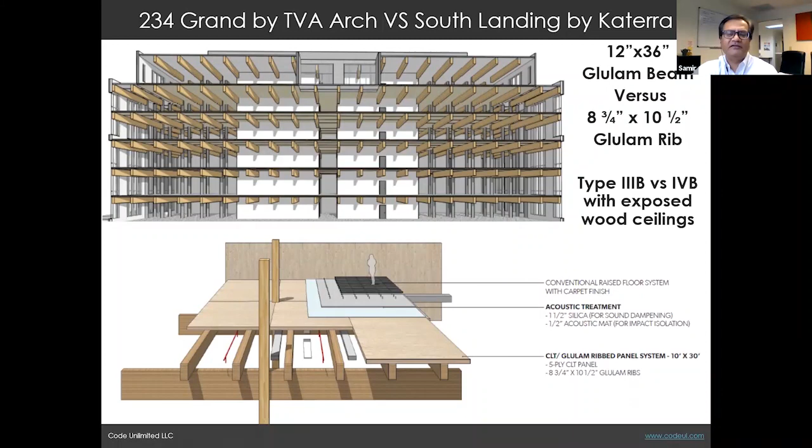So we're looking at all that data and generating it, and we're demonstrating that there is very little difference between type 4B and type 4C, and that this building therefore should be permitted to have full exposed wood ceiling. We are confident that we'll be able to demonstrate that and get it done.

It's a couple of months away before we get all that done and approved, but that's where we're heading towards. I'll just close with some of the mass timber buildings we work with, and then we have a few minutes left for any open questions specific to this presentation or unrelated. I'm fine with questions even outside of this presentation.

So this is the First Tech Credit Union, one of the largest early mass timber buildings. This went through a big learning curve. We were brought in after the fact, the design was done, and the jurisdiction was really pulling their hair out about how to get it approved, and we were brought in.

So the core thing in this one was the communication to the jurisdiction. We were able to communicate clearly how mass timber works, give specific details, and we did a lot of engineering judgments for each condition and worked it. Again, see the contrast with wood and other materials, a combination seems to work well. In this particular building, they had one type of finish on the ceiling and another type of finish on the columns. Even that variation in the stain and the finish of the wood was enough to not make it too bland and actually add value to it.

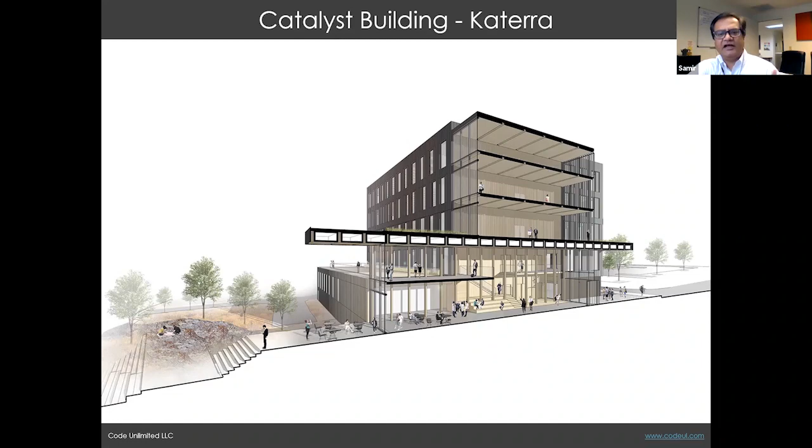So think about that. Here's the Katerra building that we used the ribbed floor system in. This was a large university campus. They started out with a large atrium and then eliminated it for cost reasons, kept it simple, and kept moving about it.

This is a smaller building, Meyer Memorial Trust, by Lever Architecture. Lever Architecture has been at the forefront of CLT throughout the country and here locally. In this one, not so much the entire building was CLT. The building was classified as type 3B rather than type 4. There are some benefits to type 3 in a smaller building versus going to type 4C because the requirements are different. So at smaller scale, CLT may not be an advantage as a construction type. You want to use it as a material and construction element and add value that way.

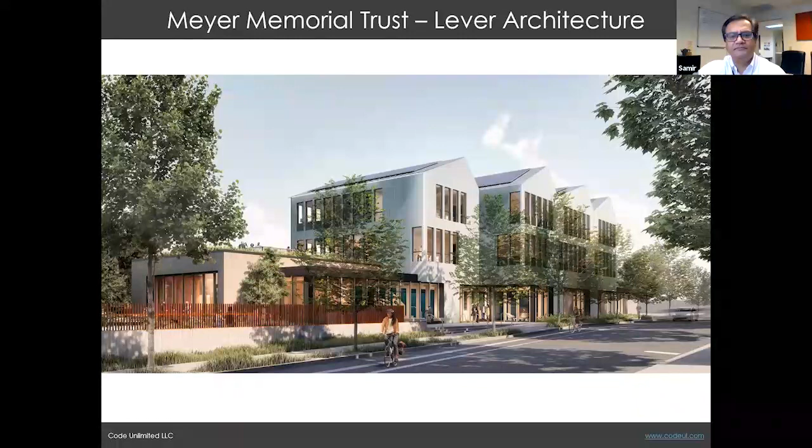But the common misconception we still struggle with is people thinking, oh, there are buildings with open exit access stairs done in the early parts of 2012, and they say, well, somebody else did it, so we should be able to do it now. Just because somebody did it because the jurisdiction did not understand the code does not make it so that you can now keep doing it.

But we were able to get them there by providing an alternate method that actually provided a sound scientific basis for what they were doing. It's much safer for you as an architect to have that demonstrated rather than somewhere down the road have an accident, and somebody come back and say, Mr. Architect or Miss Architect, you failed us and you didn't provide the due diligence and the professional level of competence that is expected of you.

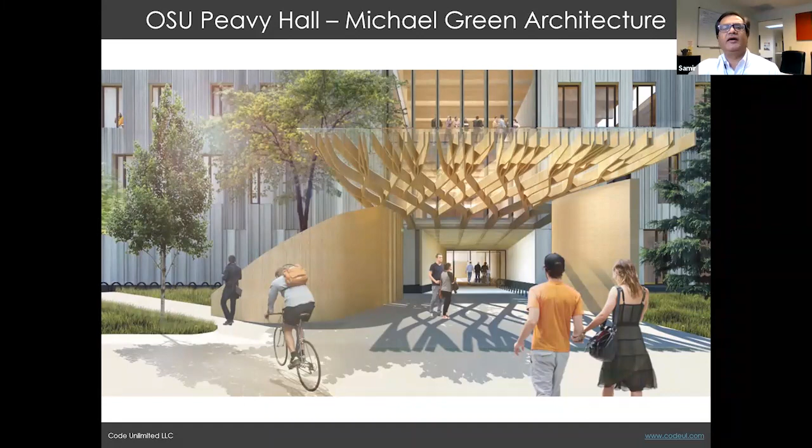Here's the OSU Peavy Hall, one of the earliest buildings. Michael Green Architecture was part of that. This is a very small structure, also the wood lab that Oregon State is developing as a Tall Woods building. It's an exciting building. Again, it had an atrium early on that was removed, as small buildings and atriums struggle with the cost models, but it was a beautiful building to work with.

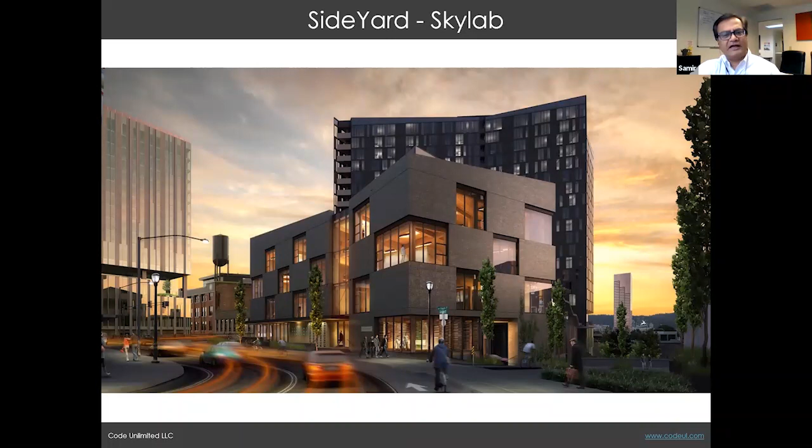This is the Side Yard by Skylab. This was also a fun building to do. Skylab is an avant-garde architecture firm that pushes the limit, and we were able to work with them on that.

So that's my presentation for today. Here's a list of services. We provide really a one-stop shop. Whatever you need to do, we can do that. So if you have a question, give us a call, we can help you.

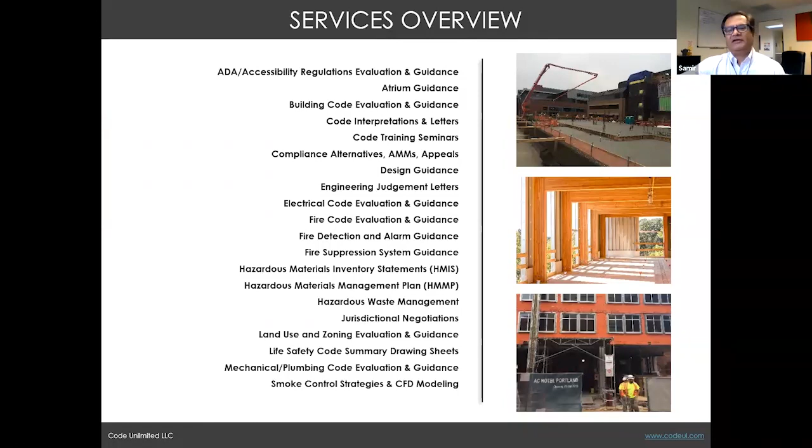First of all, I can't believe you said the architect didn't listen to us, as if that's a regular occurrence.

There are instances where architects say, 'I'll follow the rules.' I ask, have you ever followed the rules before? Why would this be different? Let's work with what we've got and get you the best answer. With all your knowledge and ability to model these things and come up with alternatives, I can't believe they wouldn't listen to you.